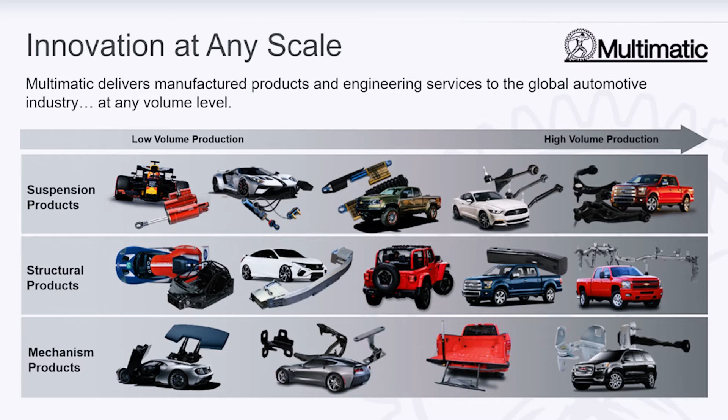And we are intentionally involved in that spectrum, starting at the low volume level, at the highest level of motorsports and niche vehicle development, in order to incubate our technology. The goal is to incubate the technology there and then to ultimately transition it into larger volume series production so that we can bring that benefit to the broadest market possible. So that's what we do and why we do it.

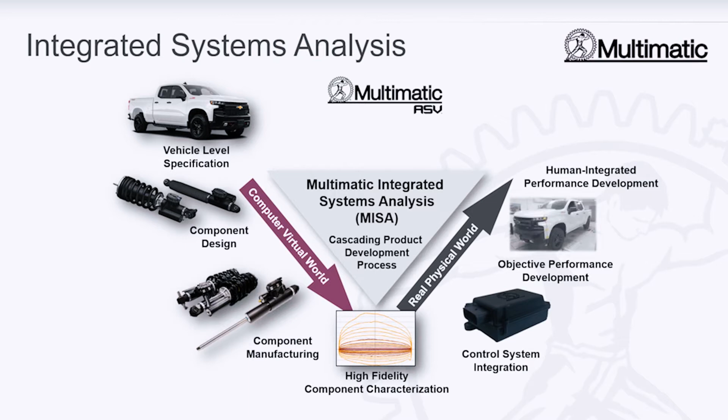Now I'd like to discuss a little bit about how we do it. Multimatic for over 20 years has been using a development process that we've internally called the Multimatic Integrated Systems Analysis process. We call it MISA for short, but quite essentially what it involves is taking vehicle-level attributes and being able to synthesize those down into a specific set of component requirements, all virtually using computer-aided engineering tools, and then being able to build and test and validate those components so that we can create a bridge between the subjective and the objective.

This has been a very valuable tool that Multimatic has used for over 20 years in developing our products. The goal has always been for us to shorten the development cycle and to bring more advanced technology to market that satisfies those higher level vehicle attributes in a shorter period of time. And the MISA process has enabled that to happen very successfully. And we then started to dream one day about being able to close that gap entirely through the use of driving simulators by bringing subjective evaluation up front into that synthesis process.

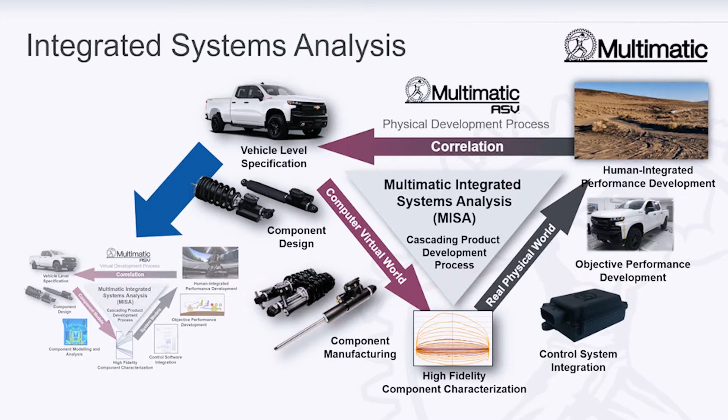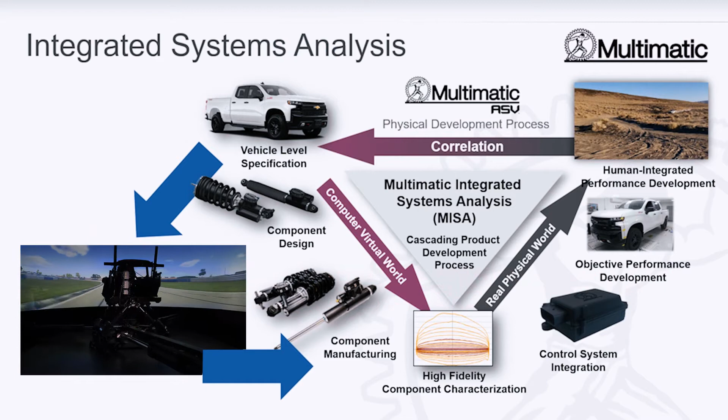So effectively, by having a driving simulator in the loop of the MISA process, we're able to create what we refer to as a mini MISA. So in the category where we're synthesizing vehicle attributes, which is really ultimately what the customer cares about, into a set of component design specifications, we're not just producing objective data that we then can bridge to what we think the subjective impression is going to be of the final consumer who drives that vehicle. We're actually able to get the subjective evaluation in real time before we build a single prototype. That doesn't just bridge the gap, that eliminates the gap. This is why we call it short-circuiting the MISA process.

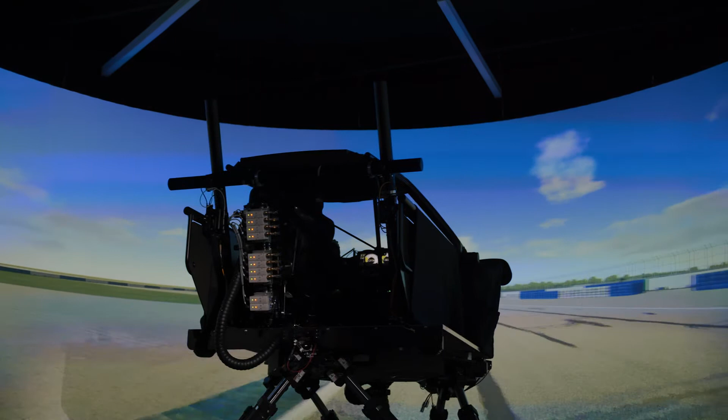Specifically, when we are at the beginning stages of laying out what vehicle-level attributes we're trying to enhance and how that relates to a subsystem or a component that Multimatic may manufacture, we're able to employ driving simulation in the loop where we're doing multiple iterations of subjective evaluation at the front end of the process, not at the tail end, in order to validate what we thought our front-end objective data was telling us. It gives us the voice of the customer right up front in the process and has really shortened the amount of development time that we can now bring products to market.

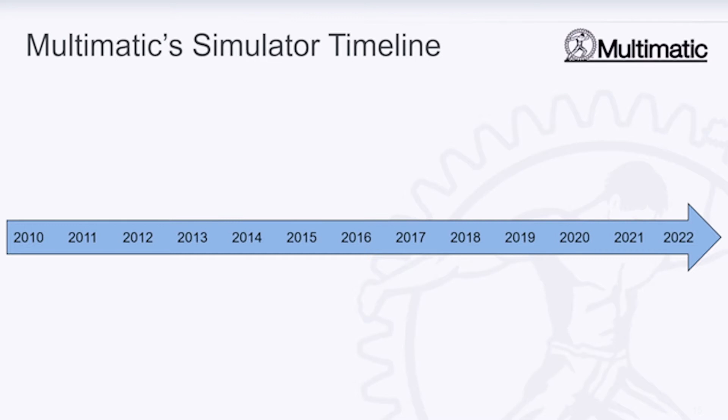Our previous MISA process we started 20 years ago was innovative and helped us have an industry-leading design and development procedure to bring products to market. But with the implementation of driving simulators starting in 2011, first in motorsports, but just like all products that we bring into low-volume applications and then bring up and scale to production vehicles, it wasn't long until 2012 that we helped develop our first road car vehicle that used Multimatic spool valve damping technology in the Camaro Z28.

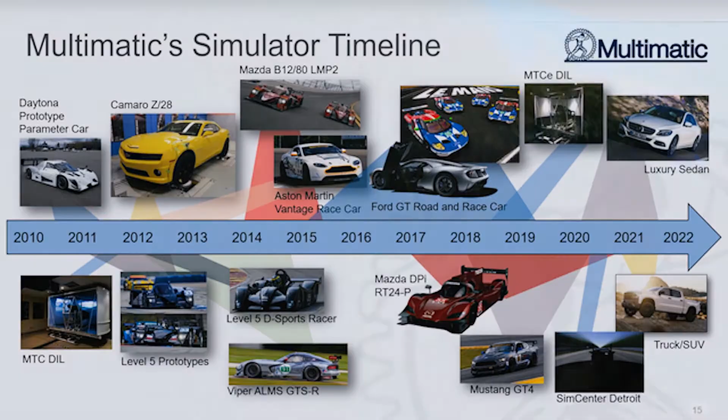From then on, we've been refining the use of vehicle simulators both in motorsports and in road car applications. And to this day, we've grown into our latest installation that you can see behind me, the DIM 250 from VI Grade, which has enabled us to not just do one segment optimization at a time, but to expand the segment so that we can address all the way from large luxury sedans to off-road and on-road pickup trucks and SUVs.

So with that understanding of how it's enhanced our product development process, I think it's also important to discuss how it really has helped us with our entire product deployment plan and how we strategize on bringing products to market. Effectively, we're more accurately able to plan what are increasingly complex vehicle systems up front that require integration with the customer's vehicle platforms and our technology partners.

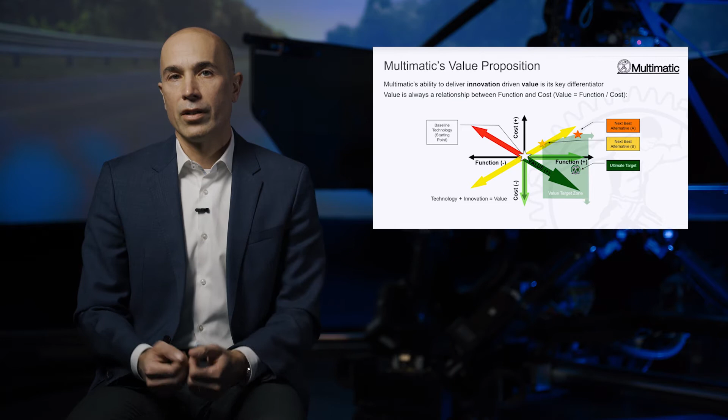In any product technology plan that we develop, an understanding of its value proposition up front necessitates really understanding that attribute improvement or what that technology is going to do for the end user. Why is that important, and how much will the customer really appreciate that? We can estimate what it costs, but understanding what benefit it is achieving helps us really develop the value proposition.

So it helps us answer two fundamental questions. What problem are we trying to solve? And what potential enhancement are we trying to make? With quantitative answers, not subjective answers, but quantitative answers based on the driver's impression or the consumer's impression up front. This all happens, again, before we build a single prototype vehicle. So when we're talking about a zero prototype summit, I think that directly addresses the importance of product deployment planning.

Multimatic is in the problem-solving business, after all, so having a tool that allows us to quantify what problem we're solving or what enhancement we're bringing to the market before building a single prototype is really critical and has had a major impact on our business.

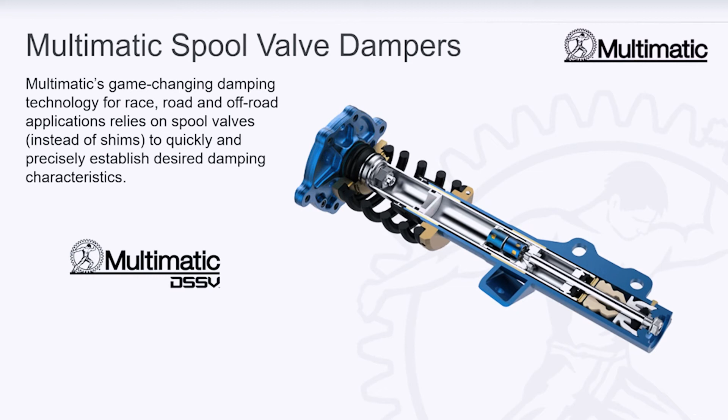To be a little bit more specific on a product that Multimatic started to bring to market back in 2002, as I mentioned previously, and continues to evolve and bring to market today, I'd like to just tell the story about how we've developed Multimatic spool valve dampers and what an integral role driving simulators have had in bringing that product to market. All throughout that development process, it's important to understand that the spool valve technology itself was invented by Multimatic in order to be an analytically determinate system.

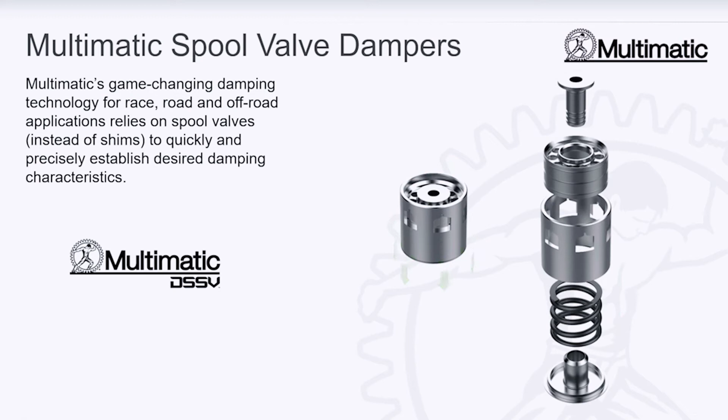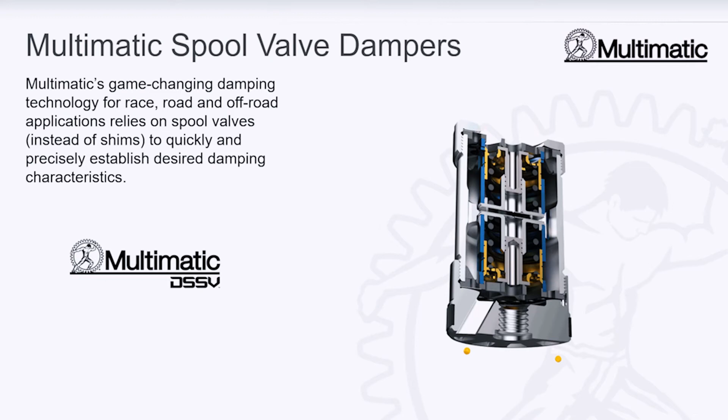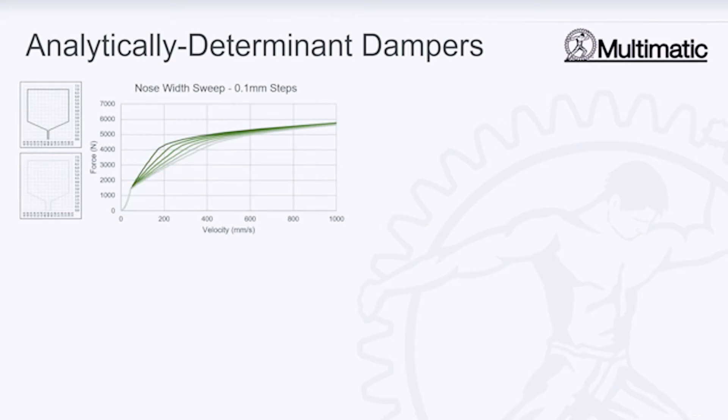It's a set of hardware that enables us to build a product that is derived from using a driving simulator to determine what force, velocity, and damping characteristics the vehicle wants to have at the component to satisfy all of the handling and ride comfort metrics desired at the vehicle level, at the driver's level. And then because of this unique technology, we're able to take and precision machine spools in order to recreate those force velocity curves precisely. With the combination of the MISA and the driving simulator and the spool valve hardware analytically determinate capability, we're able, again, to bring these products to market in a very, very short period of time.

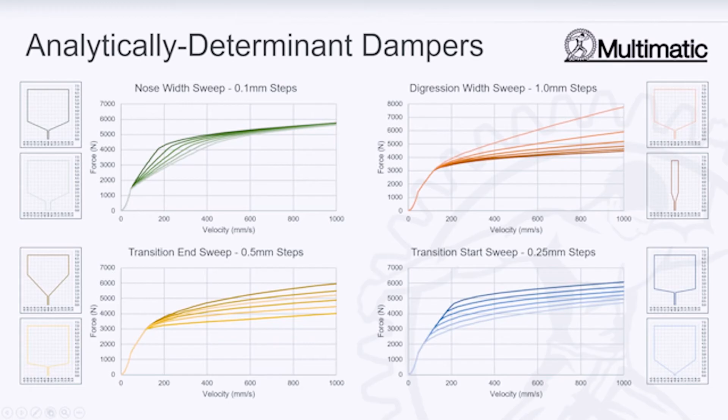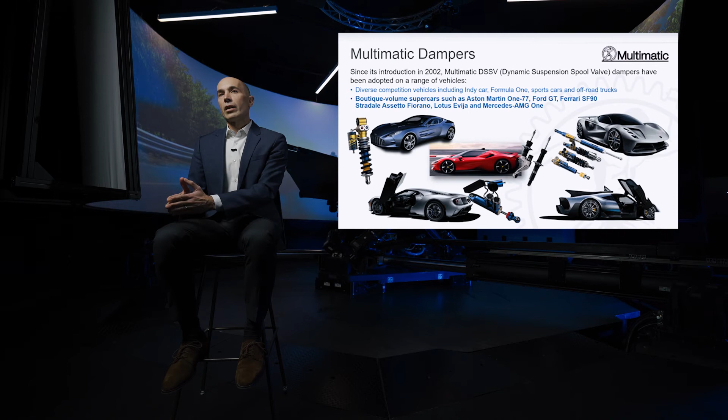What started off as a race technology with the ultimate goal of making it into road cars started in the passive world in Formula One and in IndyCar, as I mentioned, and then migrated into road car applications like the Camaro Z28 or the Ferrari SF90 Fiorano package. So we are now moving into new market segments all the time. We took that technology into the off-road world by going to position sensing damping.

And now in our latest technology, we're bringing in electronics and controls as most systems are becoming adaptive and rolling out what we call the ASV, or the adaptive spool valve damping technology, built on the previous successes we've had in the passive application. With adaptive technology and with any electronic controlled suspension capability, it really becomes critical to address upfront all of the functional safety requirements of an electronically controlled system. And the integration of software and controls becomes extremely complex as well.

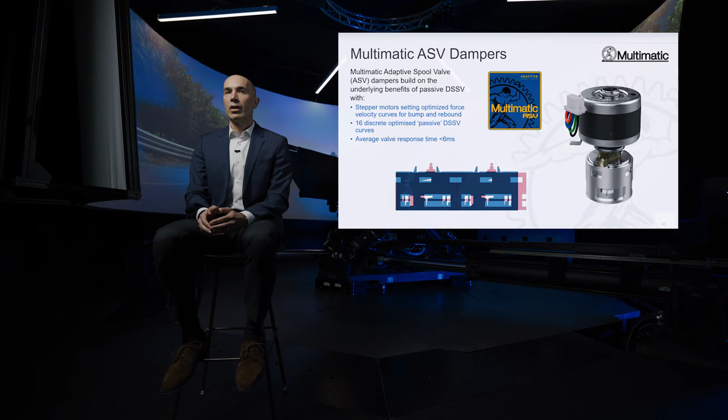So having the driving simulator not only to create that zero gap between subjective and objective parameters, but to allow for the system integration and software development and functional safety requirements, again, has really expanded its use and has shortened the amount of time it takes to bring these electronically controlled systems to market dramatically. As we migrate the Multimatic spool valve technology into the adaptive ASV product line, we now can develop that process using driver in the loop with our experts who ultimately have to do the physical hardware development and optimization in the field.

So to that end, I'd like to introduce our technical director and head of vehicle development, Murray White, who can speak to how using the driving simulator and being in the DIM in particular has helped him when he gets to the field with a physical prototype and optimizing the system. Hi, I'm Murray White, Technical Director of Vehicle Development at Multimatic. We've been using simulators for our vehicle dynamics development here for quite some time, but it's really coming along fast.

So we got to the point where we've actually been able to very successfully develop our adaptive spool valve damping algorithms, the ASV control algorithms, using a combination of offline simulation and then running various trials in the DIM to see how the different algorithms actually perform on the vehicle and what they feel like and how we can adjust the calibrations and how successful we can be with a certain algorithm with calibration adjustments, and if we really can't get what we're looking for, we go back and readjust the algorithm.